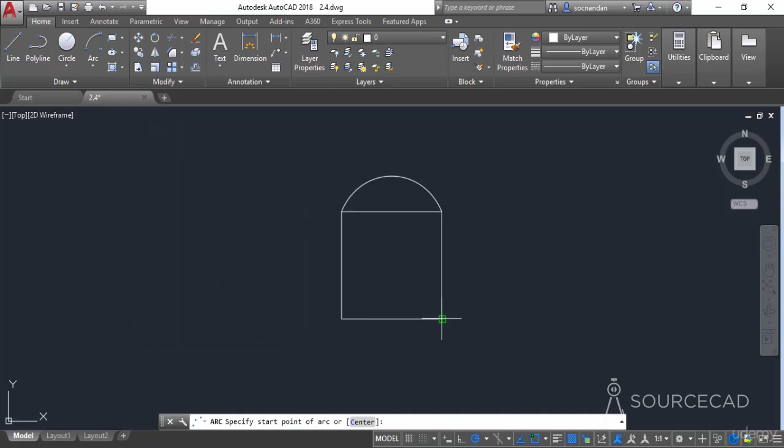Now let's look at the other option, which is start, center and end. Here we need to enter the start point first, then the center point and the end point. So let's start with the start point. I'll click at this point, that will be the start point.

Now I'll click at the center point, which will be the midpoint of this line. You'll notice that the arc is being formed in an anti-clockwise direction, just like this. Now you only need to enter the third point. Click anywhere in the drawing area to apply the third point, and I can click here to make the arc. And here we have it.

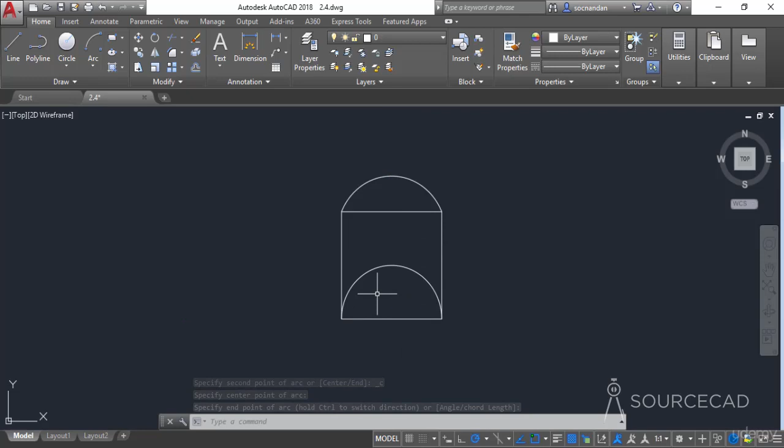Now let's go to the other option here, start, center and angle. Before making this arc, I'll simply erase both of these arcs which we have made, and now select start, center and angle. Once again we need to first click on the start point, then the center point, and now the angle. This will be the included angle of the arc.

You can enter the included angle directly by clicking anywhere in the drawing area, or you can also type the angle. In this case, let's say we want to make an included angle of 30 degrees. I'll simply type 30 on the command line and press enter. And here we have it.

Now what the included angle actually is, let's make a line to show it more clearly. Click on the line tool, and now go to the center of the arc and make this line. The angle between this line and this line is 30 degrees, and you can verify it with the angle tool. Let's zoom into this area, and here you can see that the included angle is 30 degrees. So now let's remove it completely.

Now let's look at other options here. In a similar way, you can create an arc with a chord length. Here also we need to enter the start point, then the center point, and then the chord length. Let's select it and click at the start point. And now the center point, which you can select at this point or any other point. Let's click here, that will be the center point. Now you need to enter the chord length.

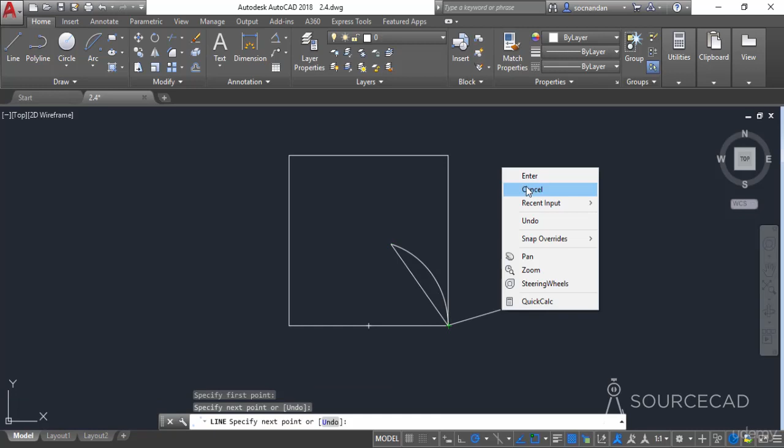In this case, the maximum chord length can be equal to the diameter. You cannot make a chord longer than the diameter, obviously, and depending upon the chord length the arc will be made. Let's say we want to make an arc with a chord length of 60 units. So let's type 60 and press enter. Now in this case, the length of the line joining this endpoint of the arc and this endpoint of the arc should be equal to 60 units. So that is the chord, and this is the chord length here, and the length of this chord is 60 units. So let's erase it.

Let's look at other options. Now we have these options in which we generally need an angle. Here also we have start point, end point, and then angle. Let's click on this start point, then the end point, not the midpoint. So here I'm clicking for my end point, and now we need to specify the angle.

This will be the included angle of the arc. Here also you can click anywhere in the drawing area to specify the angle, or you can also type the angle value. I'll simply type the angle value, which is 90 in this case, and press enter. Now you must be wondering what this 90 degree angle is. So for explaining this, I'll make a line, click on this endpoint, and join it with the midpoint or center point of the arc, and join it with the second endpoint of the arc.

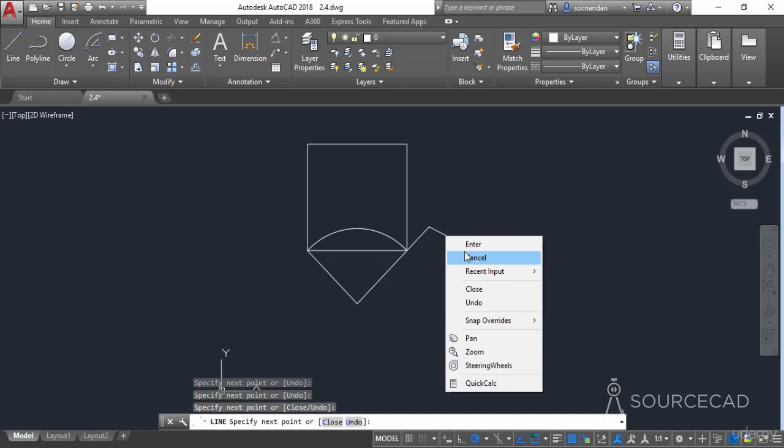Now the angle between this line and this line should be 90 degrees. You can verify it with the same angle dimension, and we'll learn about these dimensioning later on. Here you can see the angle is 90 degrees. So let's erase these geometries and look at other options.

The next option is start, end and direction. Here we have the starting point, then the end point, and now the tangential direction. As I move my cursor, the tangent line is moving, and the radius of arc is changing. Here we can change it directly, but this dotted line is always tangent to this arc.

If you want to change the direction, you can simply hold the control key and the direction will change, just like this. This control key will also work for all the remaining arcs which we have drawn so far. Let's release the control key, and now let's click anywhere in the drawing area to make the arc, just like this. Now let's look at the other option, which is start, end and radius.

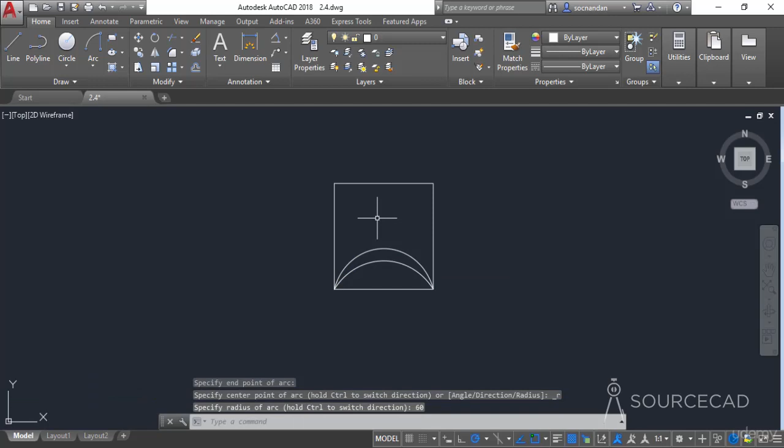In this case, we need to first click at the start point, then click at the end point, and now specify the radius value, which will be the radius of arc. Let's type a radius value of 60 units, and here we have it. Now this arc has a radius of 60 units.

Let's erase both of these arcs and look at other options. Now we have this center, start and end. Obviously we need to first specify the center point, then start and then end. Let's click at this point, that will be the center point. Now the start point, and choose this point as the start point.

You'll notice that the arc can be made in anti-clockwise direction. All you need to do is specify the end point. So here I'm clicking to specify the end point.

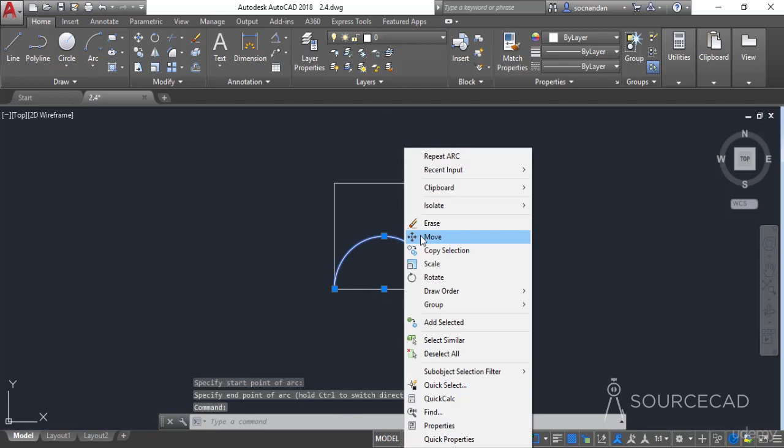Now you can change the direction of this arc simply by changing the start point. I'll select this option once again, and this time I'll select the same center point, but the starting point will be this one, and now the arc will be made in opposite direction. You can also change this direction by simply holding the control key, as we have done in the previous case. I'll just release it and click here. So let's now erase it.

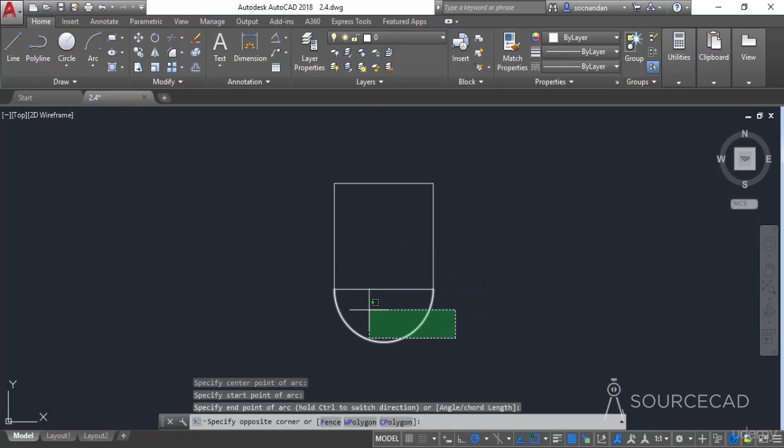Now let's look at the other options. The next option is center, start and angle. Here obviously we need to specify the center point and then the start point and the included angle. Here we have the center point, the starting point, and now we need to specify the included angle as we did in the previous case. But the only difference is that we are specifying the center point instead of the start and end points.

Here also you can click anywhere to specify the angle, or you can simply enter the angle value. So here I'm entering 90, and the arc is made with an included angle of 90 degrees. If you make a straight line here, the included angle will be 90 degrees. Let's erase it now and look at this option once again.

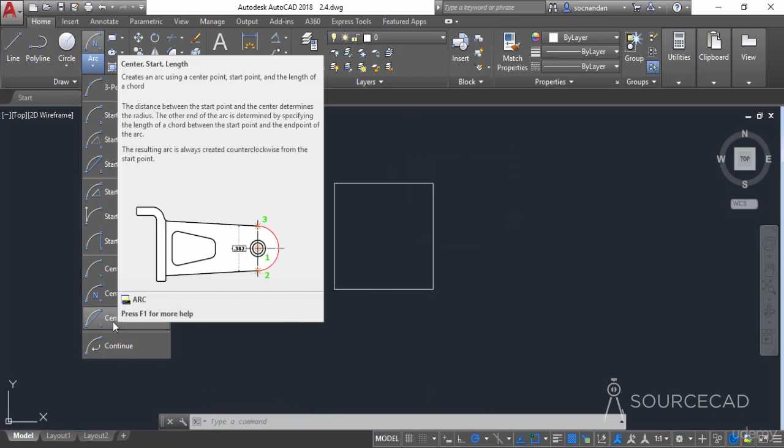Here we have this center, start and length. Obviously you need to specify the center point, then the start point and the length of chord, which is very similar to the arc we have already made. You can click anywhere to make this arc, and the length of this chord will be the length which you specified by clicking in the drawing area.

Now the last option is a little bit different, the continue arc, and for this you need to make an arc first, then only it will work. So we need to make an arc here. I'll select this 3-point option, now click at this point, now click somewhere around this point, and now click at the middle point somewhere around this. So here we have this arc.

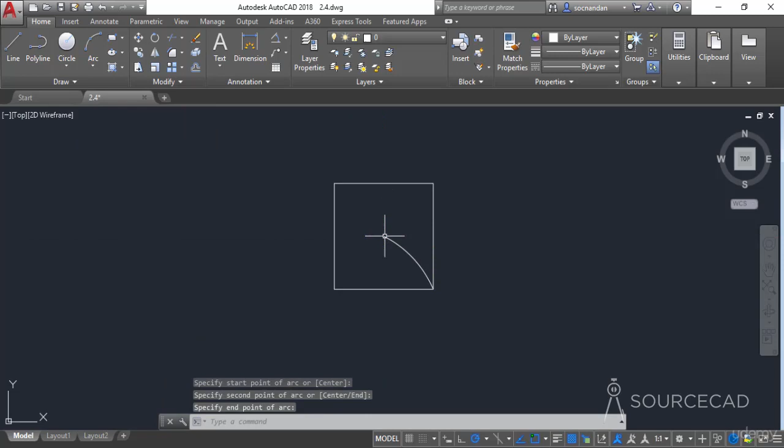Now let's go to this flyout and select the continue option. As soon as you click on the continue option, you'll notice that another arc will be formed, and that arc will be tangential, or the geometry will be completely continuous in between these two arcs.

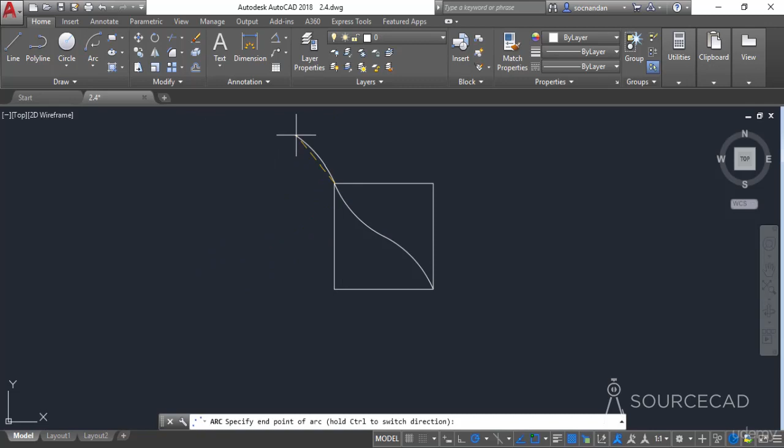If you select the continue option once again, the next arc will follow the previous one, and in this case also the geometry will be completely continuous, or the arcs will have a completely tangential geometry at the point of contact, just like this.

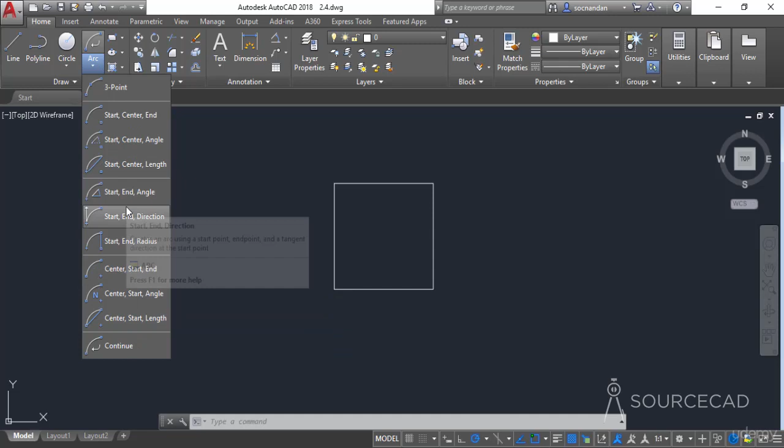So this was all about creating arcs with different options of the arc flyout. You can use any of these options depending upon the geometry which you want to make, but the most frequent ones are the 3-point arc, the start-end-radius, and the center-start-end, which I mostly use, but you can obviously use other options depending upon the situation.